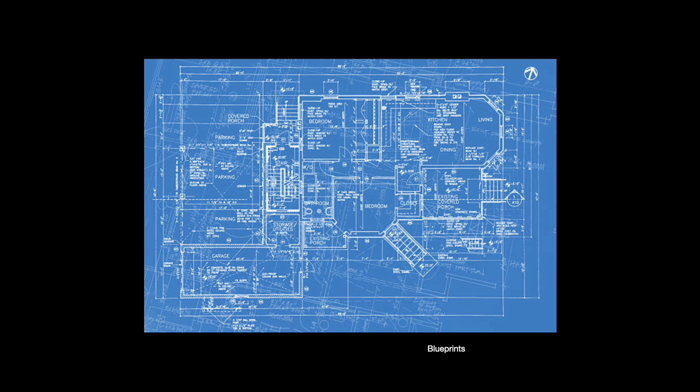Architecture often starts as a blueprint, a drawing in the old days that would show the entire structure. Sometimes architecture can seem glamorous, but in reality, it's a lot of planning and engineering and work. Architecture can start out as very simple sketches or designs, even gestural sketches. Fumihiko Maki did this drawing for the World Trade Center. It started out as a very simple curved line that then could integrate the World Trade Center with the surrounding architecture. Also, Frank Gehry is known to make scribbly gestural drawings and to sculpt household objects as inspirations for the designs of his buildings. So architecture can start out as a very simple and free and loose idea.

This is the Temple 1 in the Great Plaza of Maya. This is Tikal, Guatemala, constructed in 300 to 900 CE. Most ancient cultures derive their building materials from the earth: stone, wood, and clay. Stone, wood, and clay must be modified for their use in construction. These raw materials can result in architecture that transcends time.

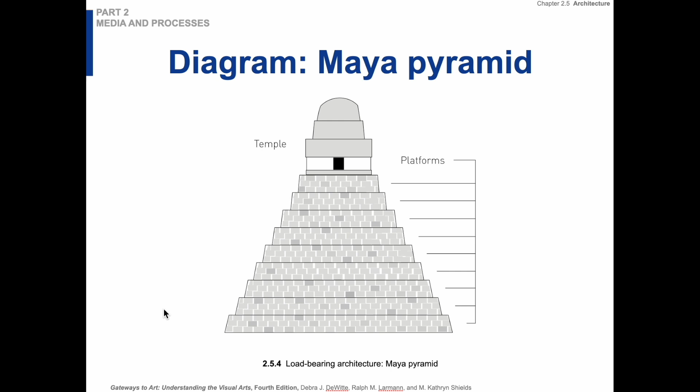This temple follows the direct process of just piling one stone or brick on top of another to create these massive load-bearing works. And these works have been built throughout history. You see this not only in ancient South and Central America, but also Egypt, Rome, Southeast Asia. This is a diagram of how it works. So one platform with bricks stacked and a smaller platform, load-bearing structures that just stack up until they reach a height. Here's Chichen Itza, which is in Mexico, one of the biggest pyramids of that area.

And it seems every other day there's an article coming out about more discoveries of ancient structures, architecture that has been buried in the jungle and covered over, sort of rewriting the book on ancient civilizations as we go day by day. If you look closely, you can see that there is a connection between ancient structures and contemporary structures. See how they're built, connected, clustered together to form communities in a very similar way.

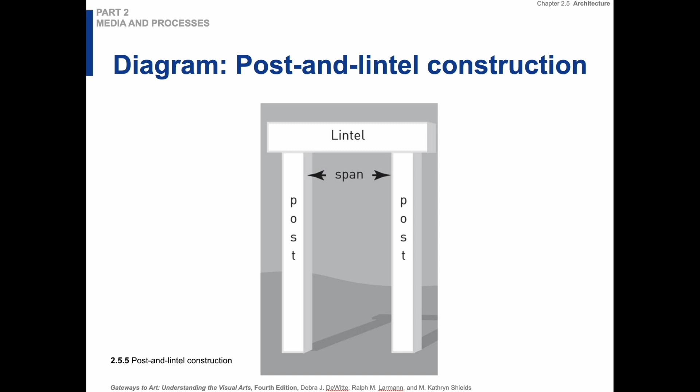All right, we're going to go through different building methods throughout time. We've already covered the load-bearing, stacking bricks on top of each other. Now let's go to the post and lintel construction. This is basically when you have two posts and a lintel. To create an interior space, an architect must create a span or a distance between two supports. In basic post and lintel construction, the lintel rests on top of two posts.

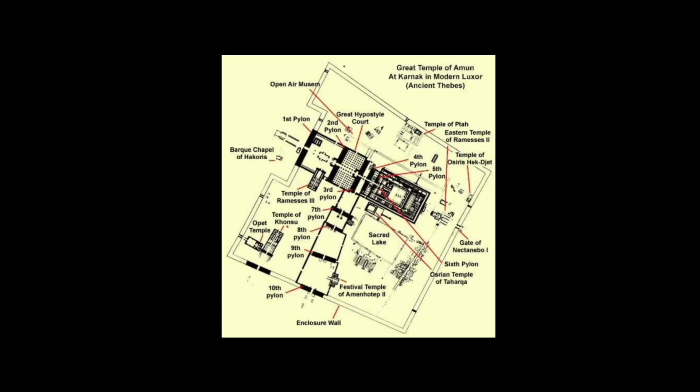So the post and lintel construction is used to monumental success in the Great Court at the Temple of Amun-Ra, hypostyle hall, a room created by using a series of columns to support a flat ceiling. This was used by Egyptian priests for rituals to worship the god Amun-Ra, and it's one of the largest religious structures in the world. So the high priest would go inside of this hypostyle hall and worship, do their rituals, but ordinary people would not be allowed into this center court. They would have to stay outside.

The ancient Greeks also used the post and lintel construction, and the architects must have been aware of the majestic structures in the Nile Valley, because the ancient Greeks adapted the systems invented by the Egyptians and then standardized them into three distinct types of columns. This is a temple of Athena built in Greece 415 BCE, using the post and lintel. Here are the three different kinds of columns that they used.

The standardized column is an essential point of compression to support the weight of a building. You have three parts to it: a capital, that's the top part; a shaft, that's the long skinny part; and then a base, which is the bottom part. Here's a diagram. And the three different ones, the Doric, the Ionic, and the Corinthian. The Doric just has the normal sprouted end. The Ionic has the circular scroll, and the Corinthian has a floral decoration on it. So if you see one of those three, sometimes they're on American buildings as part of classical revival architectural constructions.

So also in early architecture, lintels could not span large spaces. Stone would snap under the heavy pressure. That's why the ancient temple in Karnak of Amun-Ra has so many posts, because you couldn't create a long span. You had to put tons and tons of posts to create that interior space. So instead, they created the arch, the corbelled arch. That's where bricks are stacked and slowly come inwards progressively. And then there is the rounded arch, which is more like the Romans used, that pushes the weight of the load outwards. So the corbelled arch is mainly used by the Babylonians and the Mycenaeans, and the rounded arch is perfected by the Romans.

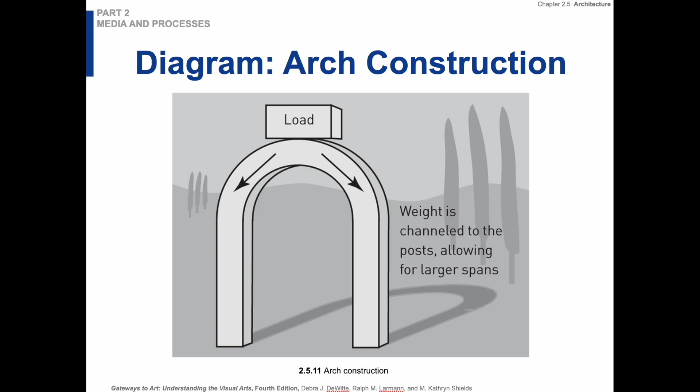This is the Treasury of Atreus. It's a very old building, 1250 BCE in Mycenae, Greece. Early Greek construction that uses this corbelled arch, as you can see here, progressively cantilevering the stones above the lintel allows for more light to enter the chamber. Here's a diagram of the rounded arch, where the weight is channeled to the posts for spanning larger areas. The Romans perfected this rounded arch. It's a more efficient way of distributing stress over the whole structure. It efficiently helped the Romans span wider spaces than previous architects had managed.

This is the Pont du Gard. It's an ancient Roman structure in southern France. It's an aqueduct and a bridge. No mortar, stones fit perfectly together. No mortar, can you believe that? It benefited the local community, and it projected Roman imperial power. So the Romans brought water down this arch. It all goes downhill and brings water into the city. It progressively gets shorter and shorter, so that gravity will bring the water. Amazing ancient structure and use of the arch.

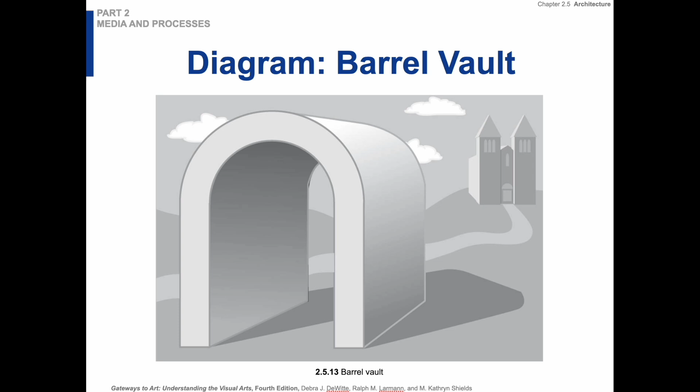The arch is also used in the Colosseum. The Colosseum is essentially made of tons and tons of arches stacked on top of each other, around and around and around. One of the great buildings of the ancient world. It was a stadium for Roman gladiator games and spectacle. Next, we have the barreled vault. This is the most common type of vault. The barreled vault consists of a long semicircular arch. So it's basically tons and tons of arches stacked on top of each other.

Here's a vault from a church in France. A vault is an arch that has been extended like a long hallway to create an open space overhead. So this is a perfect example of a barreled vault. It can span larger areas of interior space and was very important during the European Middle Ages.

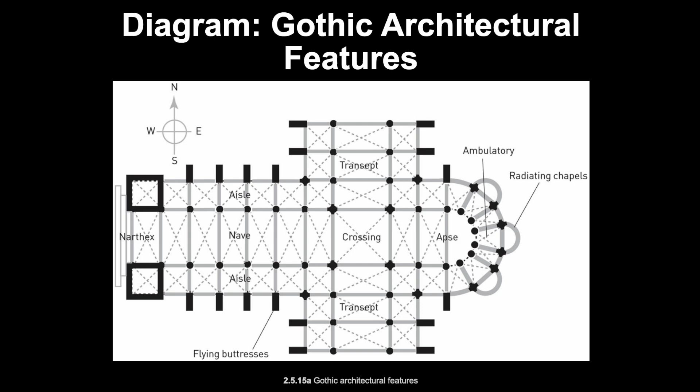Here's a diagram of a Gothic architecture barrel vault. You also have flying buttresses, which are supports to transfer the weight of the arch outwards. So we have the buttress, this area that spans an open space supporting the barreled vault. It's how weight is transferred.

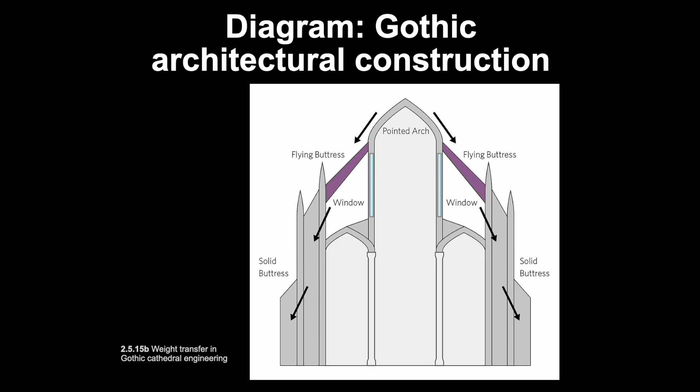Abbot Suger, he believed worshipers should be bathed in divine light. So he redesigned churches to have these enormous windows, all this light coming in, so you should feel uplifted towards heaven. So they had to use the flying buttresses to allow that type of support, because before that you would have these very austere churches. So you have these pointed arches, ribbed vaults.

Next we have the Hagia Sophia. This is the structure, and the innovation in the Hagia Sophia is the dome. Structurally, a dome is an arch rotated 360 degrees on a vertical axis. It's a very strong structure and can span large areas because the weight is dispersed outwards toward the walls. Here's a diagram of it.

And this is the interior of the Hagia Sophia in Istanbul. It's a Byzantine structure, impressive, enormous dome roof. It's the largest interior space of any cathedral for nearly 1,000 years, until it was surpassed. There are illuminated clerestory windows, and pendentives transfer the load of the circular dome to 4 massive pillars.

This is another one of the great architectural wonders of the world, and it was a Christian church during Byzantine times, and then it was transformed into a mosque. So it's been many things throughout its history.

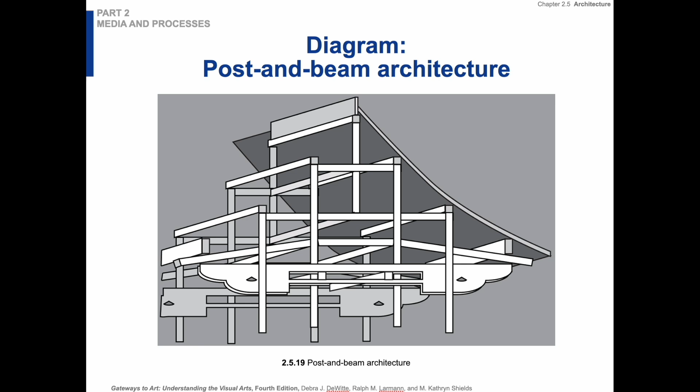Amazing church in Istanbul. The next innovation is post and beam architecture. The post and beam construction technique had been used to build some of the world's finest wooden architecture. This is used in medieval Japanese architecture. In the 7th century, the Horyuji Buddhist temple was constructed in Nara, Japan.

Yomei, who was the emperor, built this temple for divine spiritual favor because he was sick, but actually died before it was completed. The empress and the crown prince finished the construction on this temple, fulfilling his dying wish. It is still standing to this day, one of the oldest wood structures in the world, a testament to how well these structures can last if built with great craftsmanship.

Let's now talk about the building materials of the modern world. The stick-style house, this is a stick-style house in Ontario, Canada, built in 1832. This is what they call balloon framing. It was originally a derogatory term because people would say that it was very poorly constructed. It was invented in 1832, and is commonly used in the US today.

It's lightweight wooden frames that support the structure, and using power saws was the big innovation with this. Once you could use power saws and quickly cut lightweight wood, you could create these complex frames. The stick style has a decorative design and asymmetry with steep roofs.

In the 1850s, we have this innovation called cast iron. Skeletal cast iron structures support glass walls and roof. This is inspired by architects like Eiffel. This was a great example of the skeletal cast iron and glass that was used in Joseph Paxton's Crystal Palace.

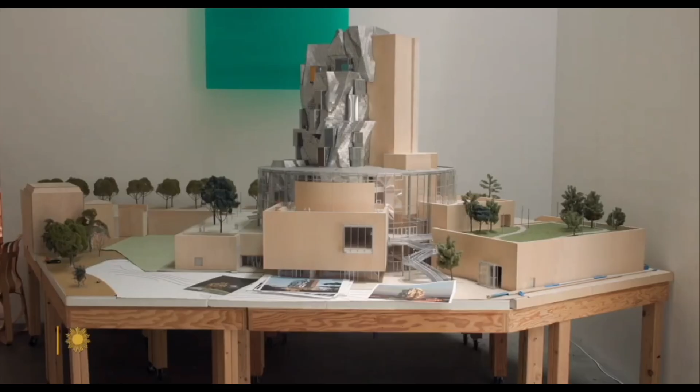We have the Dancing Building in Prague and the Lou Ruvo Center. These are both designed by Frank Gehry, and the very famous Guggenheim Bilbao Museum designed by Frank Gehry. Frank Gehry often will design his buildings with garbage or cardboard and uses them from a sculptural perspective first. And then he has his engineers take his sculptures into their engineering programs where they will then make them structural and sound. So he's been called very impractical and often goes way over budget with his designs, but they are beloved and huge tourist destinations upon completion, and they often use unconventional building materials.

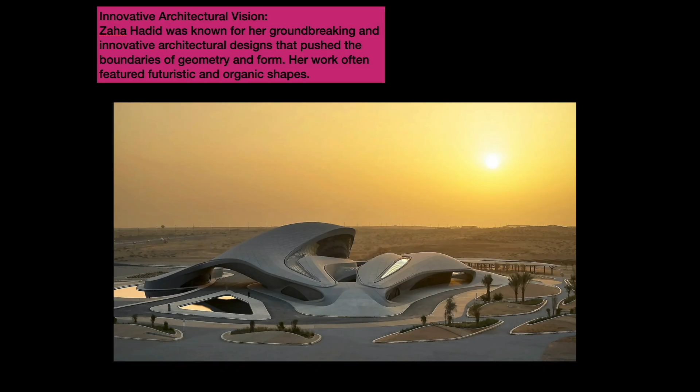Zaha Hadid pushed the boundaries of geometry and form. Her work often featured futuristic and organic designs. She's been a pioneer in digital design and parametric modeling, a technique to create complex and fluid architectural structures, which has become a hallmark of her style. First woman to win the Pritzker Prize.

In our current situation, inexpensive alternative materials can be used to create. California homes can be extremely costly, so based on a prefab module, sustainable wood, double pane windows, roof solar cells, and recyclable materials were used to create the Michelle Kaufmann House. Because of climate change, soaring housing costs, and inefficiency in older designs, there's a push to make these cheaper and renewable buildings that are made out of recycled materials. That's where we're at in our current state. Try to make a building that can be sustainable for the future.